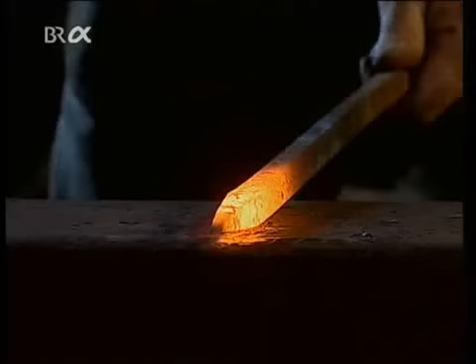For centuries, whenever work had to be done, man was dependent on sheer muscle power. Later, with the help of water wheels and windmills, he was able to utilize the power of the elements, but only to a limited extent.

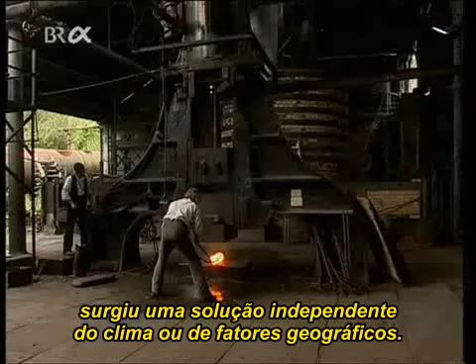It was not until the early 18th century that a new solution presented itself to those who wished to be independent of the weather and geographical factors. That solution was the steam engine.

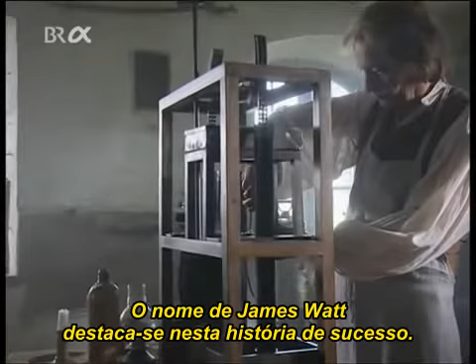One name stands for its success story, that of James Watt. This Scottish engineer didn't invent the steam engine, but he vastly improved the original concept.

In 1775, Watt and his partner, Matthew Boulton, set up a factory in Soho, today a part of Birmingham, which manufactured modern steam engines for delivery to industrial centres all over Europe.

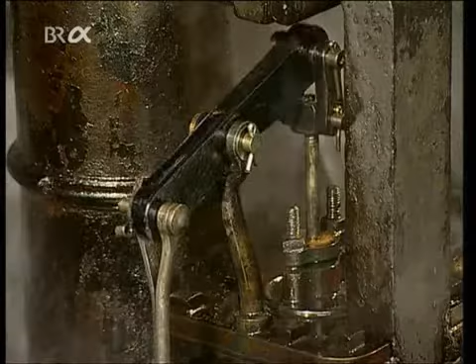Visitors asked Watt himself about all the latest technical developments. But he wouldn't reveal any details. Indeed, he kept his knowledge a closely guarded secret.

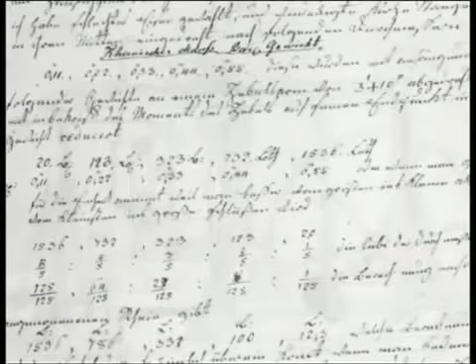Any visitor who made too many sketches, like German engineer Georg Friedrich von Reichenbach, was seen as a spy and quickly shown the door. Watt had acquired his expertise at great effort over many years.

James Watt was born in Greenock, near Glasgow, in 1736. His father was a ship's chandler who had his own small workshop. From time to time, he also repaired nautical instruments.

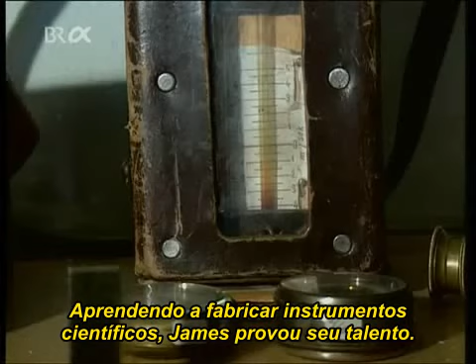James spent a lot of time in his father's workshop, watching him at work. At the age of 18, he started an apprenticeship as a precision engineer in Glasgow, which he completed in London. James learned how to manufacture scientific instruments, and in doing so, provided proof of his talents.

In 1756, Watt returned to Glasgow. Since the length of his training did not meet the requirements of the craftsmen's guilds, he was not permitted to set up his own workshop.

However, Glasgow University required his services. And in 1757, it allowed him to open up a small instrument-making business on its premises. This was a real stroke of good fortune for Watt, since staff at the university imparted modern technical knowledge and engaged in research.

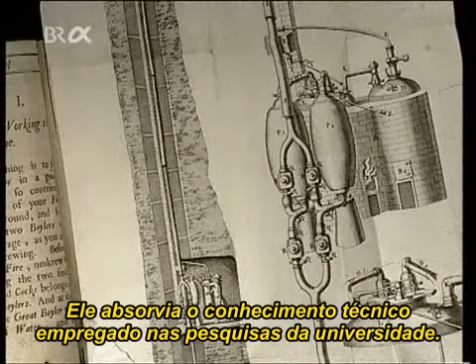Its scientists were particularly interested in the steam engine. It enabled heat to be converted into mechanical energy.

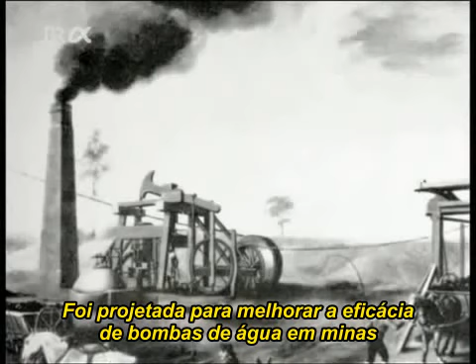In 1712, a blacksmith and inventor called Thomas Newcomen had built a practical steam engine. It was designed to improve the efficiency of water pumps in mines so that galleries could be driven further underground.

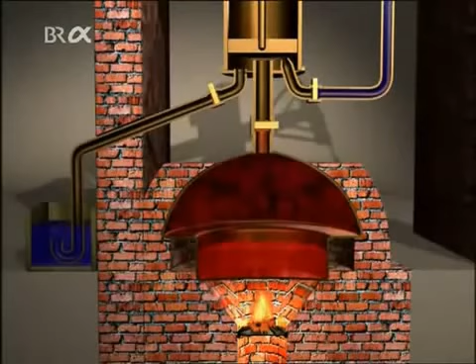With Newcomen's invention, water is made to vaporize in a boiler. The steam is fed into a cylinder. The pressure from the steam and the weight of the pump rods on the other side of the beam slowly force a piston in the cylinder upwards.

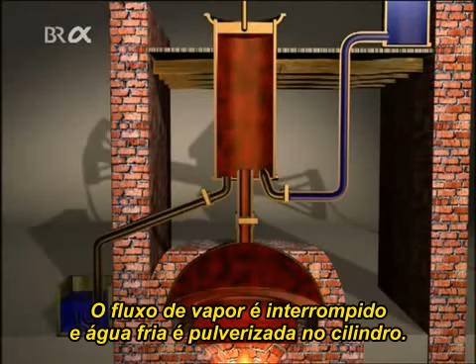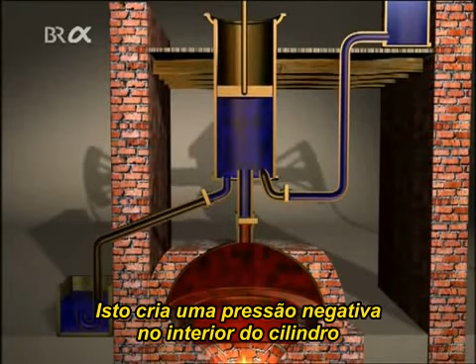The steam supply is now cut off and cold water sprayed into the cylinder. The steam condenses and its volume decreases abruptly. This creates negative pressure in the cylinder and, because of the atmospheric pressure acting from above, the piston moves back down into its original position.

The water that is collected in the cylinder is drawn off and the process starts again.

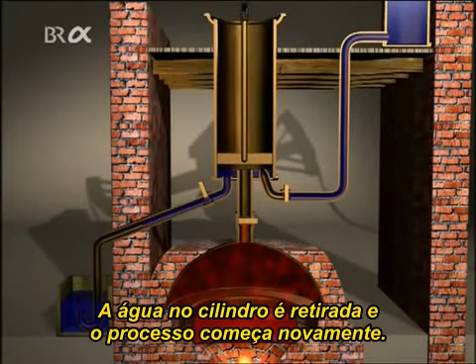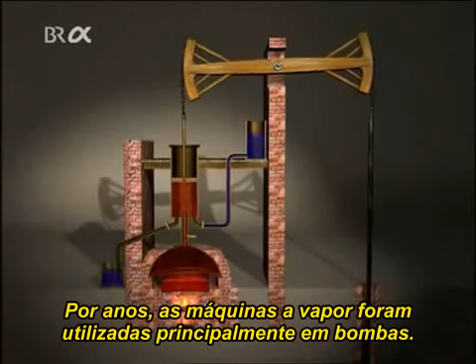For many years, steam engines were used primarily for operating pumps. Newcomen's success was also revealed by the fact that a model of his machine was used at Glasgow University for explaining how steam engines worked.

But the model didn't always function as well as intended. When it came to an unexpected stop yet again, it ended up on Watt's workbench for repair.

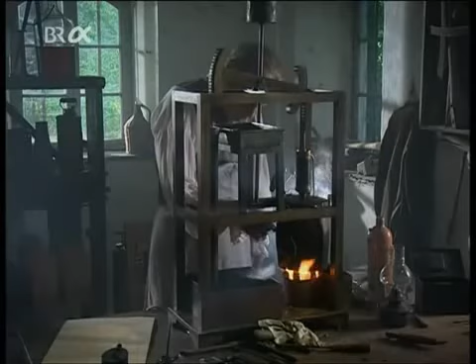James Watt began to examine a machine that was totally new to him. He discovered that the principle was not very economical, because when the cylinder fills with steam it gets very hot, and when condensation takes place the cylinder cools down considerably.

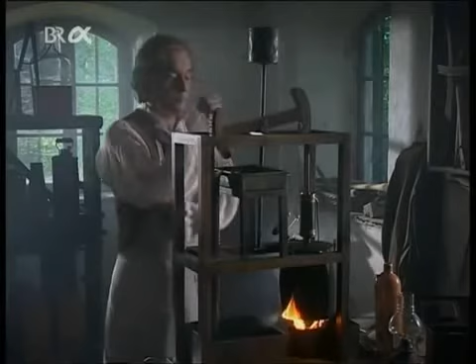With each working cycle, the cylinder first has to be heated up again, so a large amount of the steam supply is wasted.

Is it really necessary, Watt thought, for the cylinder to cool again? Surely leaving it hot would be much more efficient, but in that case, how could the steam be condensed?

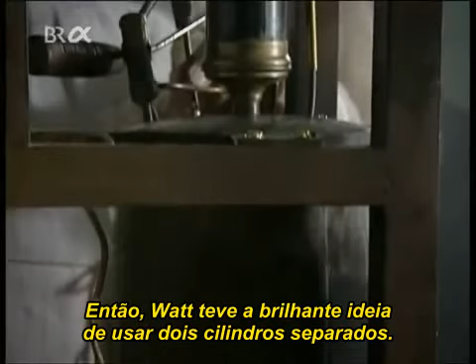Watt then had the brilliant idea of using two separate cylinders.

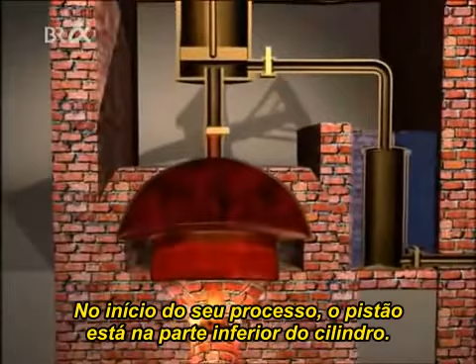At the start of his process, the piston is at the bottom of the cylinder. When steam is introduced under the piston, this subjects it to pressure. As with Newcomen's machine, the pressure from the steam and the weight of the pump rods force the piston upwards.

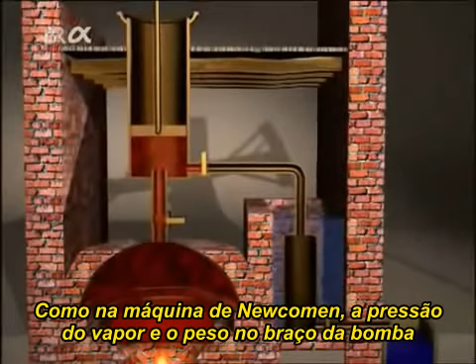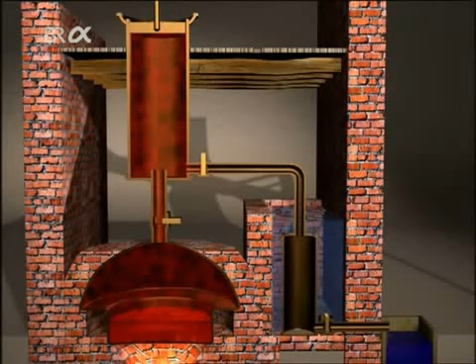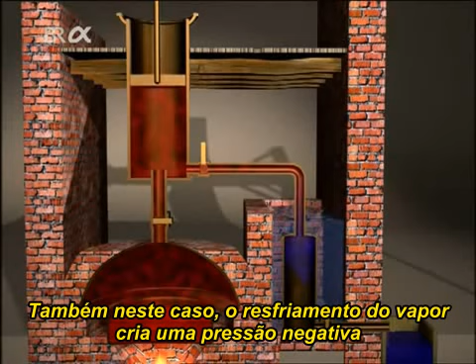Now the steam supply is cut off and a pipe leading into the second cylinder, the condenser, is opened. In this case too, the cooling of the steam creates negative pressure, which, together with the atmospheric pressure, forces the piston back down.

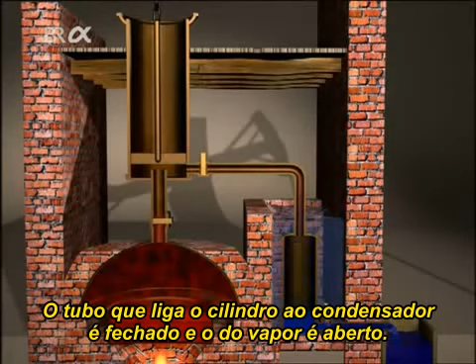The pipe connecting the cylinder with the condenser is then closed off again and the steam valve opened. The process can now be repeated without the steam cylinder having to cool down.

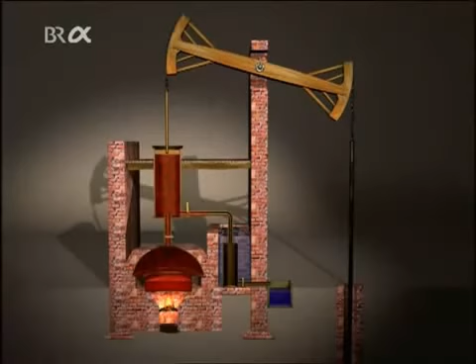In 1769, Watt had his improvements patented, but in order to build a practical steam engine, he needed a lot of money.

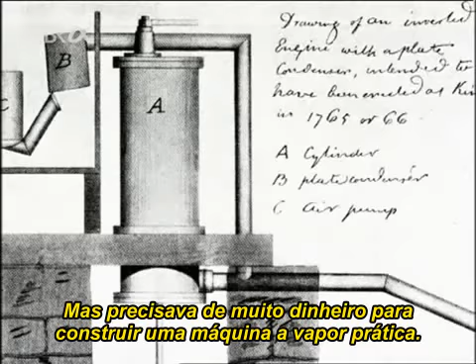He found a financier in John Roebuck, a mine owner. In return for his support, Roebuck claimed a 2/3 share in Watt's patent.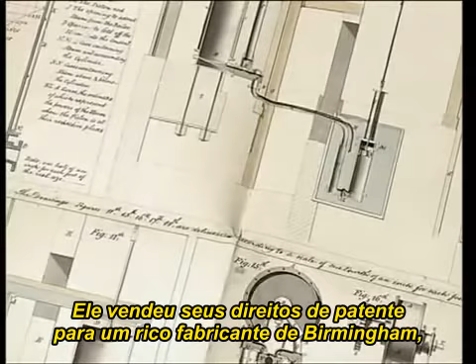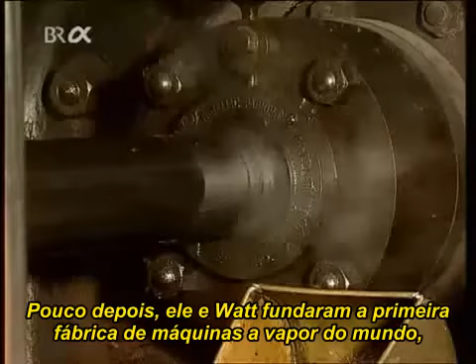But 4 years later, Roebuck went bankrupt. He sold his patent rights to a wealthy manufacturer from Birmingham, Matthew Boulton. Boulton immediately recognized the importance of Watt's steam engine. Shortly afterwards, he and Watt founded the world's first factory for manufacturing steam engines, Boulton and Watt.

Only a year later, production got underway. Meanwhile, Watt was already working on further improvements. His aim was to boost the efficiency of the steam engine so that it could be used for other tasks besides operating pumps. He achieved this with his double-acting steam engine.

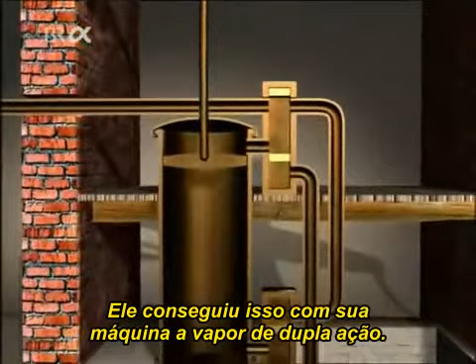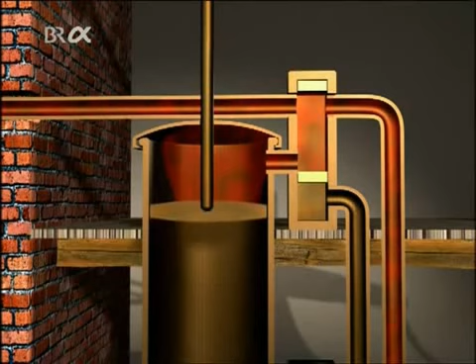First of all, steam flows into the cylinder and forces the piston downwards. Watt's idea was that when the piston is at the bottom of its stroke, steam pressure could also be used to force it back up.

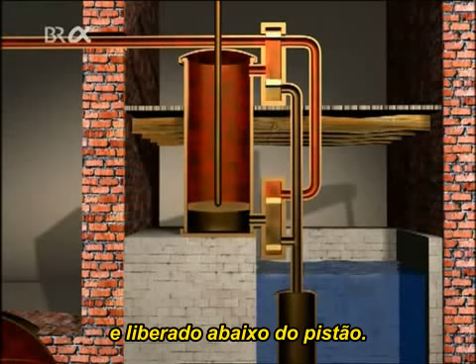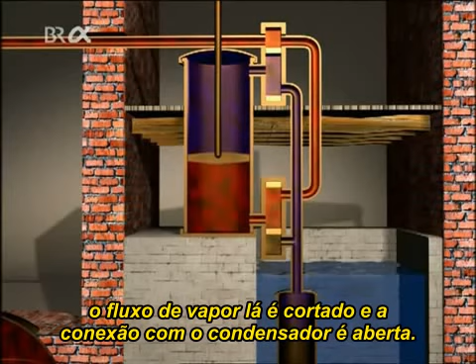To achieve this, the steam supply is cut off at the top and opened up at the bottom of the cylinder. Steam now flows into the cylinder from below and forces the piston back up, and to prevent steam at the top from impeding the upward movement, the steam supply there is cut off and the connection to the condenser opened.

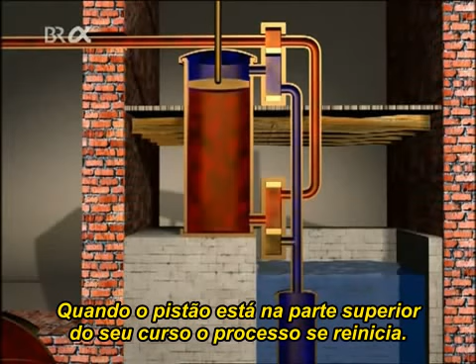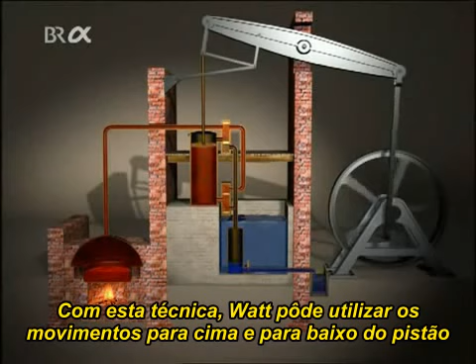When the piston is at the top of its stroke, the process begins again. The steam supply is opened at the top of the cylinder and shut off at the bottom. At the same time, the connection to the condenser for the superfluous steam is opened. With this technique, Watt was able to utilize both piston movements, upwards and downwards, to achieve a vast improvement in efficiency.

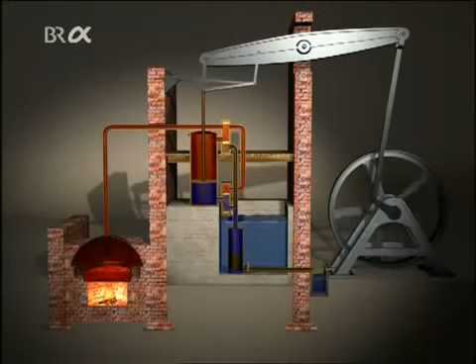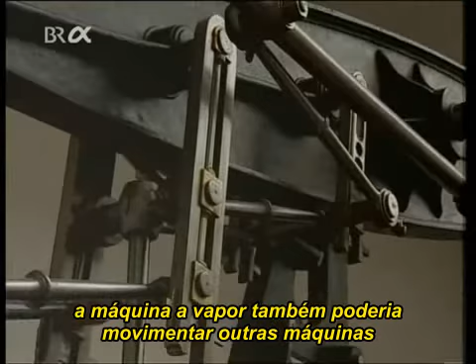The double-acting steam engine was also suitable for converting the up and down motion of the piston into rotary movement. So instead of just pumping water out of mines, the steam engine could also be used to drive other machines as a substitute for wind and water wheels.

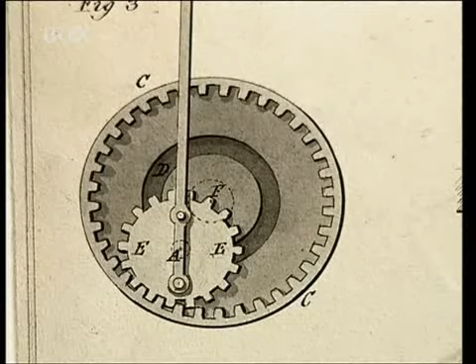To achieve this, Watt invented a special transfer mechanism, a planetary gearing. In addition, uniform rotary movement is attained by means of a large, heavy flywheel.

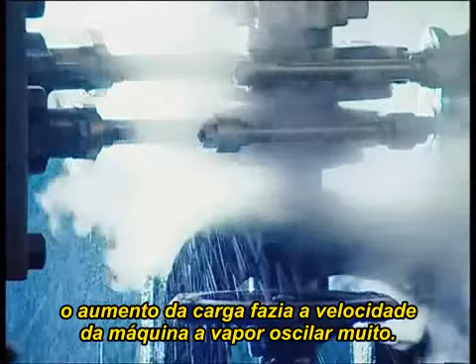But one major problem remained. If several looms in a mill were operated simultaneously, the heavy load caused the speed of the steam engine to fluctuate considerably. To correct this, the steam supply had to be regulated by hand. But in 1788, Watt solved the problem. He developed an automatic speed control, the centrifugal or flyball governor.

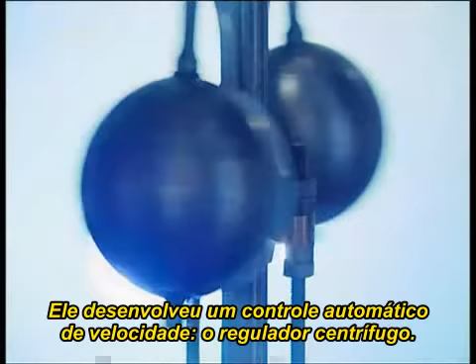If the speed of the steam engine increases, centrifugal force causes two rotating masses to move outwards. This motion is transferred to a throttle valve, which reduces the steam supply from the boiler to the cylinder, so the machine again runs at its original speed. Conversely, if the steam engine is running more slowly than normal, the throttle valve opens to raise its speed. It's an automatic control system.

In order to describe the advantages of his rotary steam engine in a better way, Watt introduced a measure for its output: horsepower. The work done by horses had been used for this purpose at an early date, but Watt made the comparison more precise.

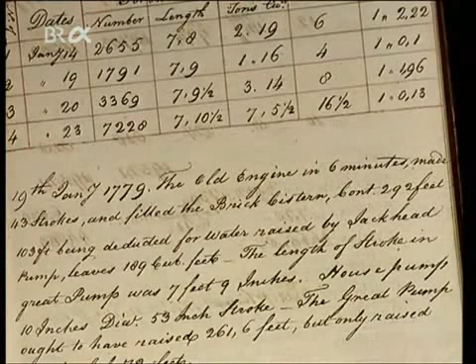In 1782, he calculated the size of a steam engine for a sawmill. He'd obtained data on the performance of the horses used in it from the miller. On the basis of this, Watt determined that 1 horsepower was the amount of work needed to raise a mass of 75 kilograms 1 meter in 1 second.

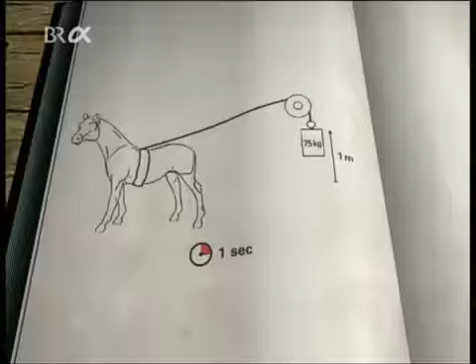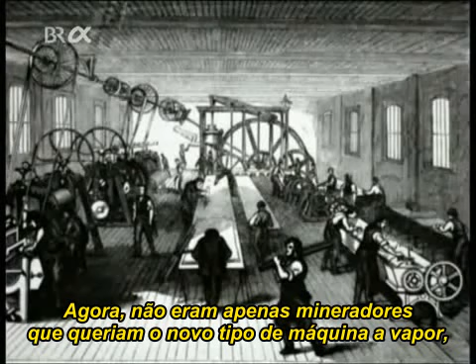Through their improvements, Boulton and Watt enabled the steam engine to achieve a breakthrough. Now, it wasn't just mine operators who wanted the new type of steam engine, but also the owners of paper and cotton mills.

A few years later, James Watt was a wealthy man. Patent revenues to the tune of more than £76,000 swelled his bank account. And his achievements were soon recognised by Britain's social elite. In 1785, James Watt, a man who had never studied, was made a Fellow of the Venerable Royal Society of London.

Watt's steam engine was successful, but the limits of its performance capacity had not been reached. However, Watt's patent rights prevented other engineers from developing steam engine technology any further. They had to wait until 1800, when his patents expired.

One step which Watt had always declined to take was the use of higher pressure in his steam engines. But this enabled the construction of smaller and even more efficient machines, which opened up new areas of application.

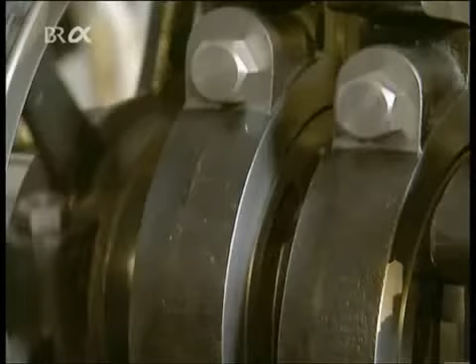In 1804, Richard Trevithick built a steam engine that could travel on rails. George Stephenson used the concept in designing his locomotive, the Rocket, which in 1829 won a speed and endurance contest near Liverpool. In addition to the railways, it was above all large steamships which used the new engines.

James Watt died in Heathfield near Birmingham on August the 25th, 1819. Nearly 200 years on, the man whose developments launched the modern industrial era is still very much present in our everyday lives. Not only in the horsepower unit which he introduced, but also in the watt and the kilowatt, units which have replaced horsepower as a means, for example, of indicating the output of a car engine.